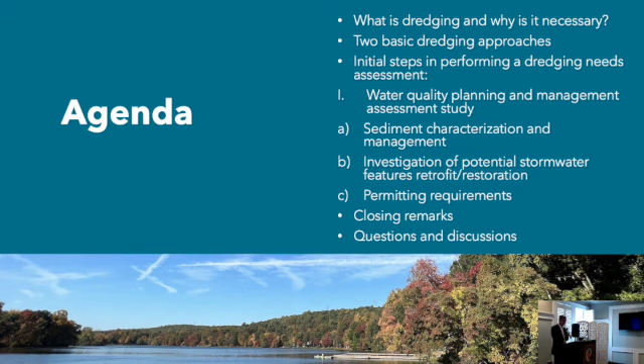So what is dredging? Dredging basically is the removal of organic matter and accumulated lake bottom sediments. That happens from a lot of natural processes, and can also be accelerated by man-made activities.

I have a lot of associations where the watershed directly adjacent to the lake was heavily wooded and naturally vegetated a long time ago, and then as years have gone on, members and property owners have cut the trees. They prefer to have grass over natural vegetation, and that has accelerated the deposition of organic matter, as well as adding nutrients and other things, which we won't get into today. But that affects the water quality of the lake. A lot of our lakes are now dealing with algal blooms and other things that are a function of the nutrients.

The dredging process essentially consists of 4 phases. You've got to loosen the bottom material. Every lake is different with respect to what the bottom material is. Again, for dredging purposes, we're really talking about the materials that have accumulated over time. So it's not deepening what the natural depth of the lake was—that's a whole different process and different permitting process through the DEP. So the way I'll be talking about dredging today is more focused on what has accumulated over time at the lake bottom and how to manage that.

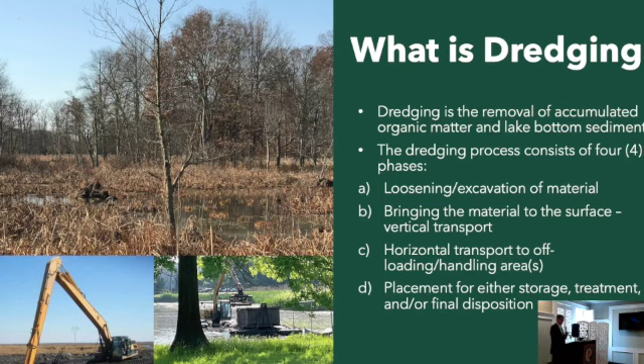Why dredge? Predominantly what I see from the associations I work with and lake owners is to restore the recreational access for boating, swimming, and fishing. Those are the primary benefits of dredging, as well as obviously aesthetics being a big part of it, and improved water quality and health of the lake.

This is not dredging. Dredging is not the sole factor that will help improve the water quality and health, but it's certainly one of the many steps that can be a benefit.

Other benefits are, sediment continues to move. If you look at this picture, the bottom portion here, you can see a lot of sediment accumulation from inflowing streams of that nature. As storms occur and high flows come in, that sediment continues to get resuspended and migrated down into the impoundment, the water body. So the benefit of removing that is it lessens the conditions from getting worse downstream.

It improves fish habitat and reduces rooted aquatic plants, which many lakes deal with as challenges. And then there are lake-specific concerns, so it can be algal blooms, Lyngbya, or shoreline issues. Again, a lot of them are site-specific to lakes.

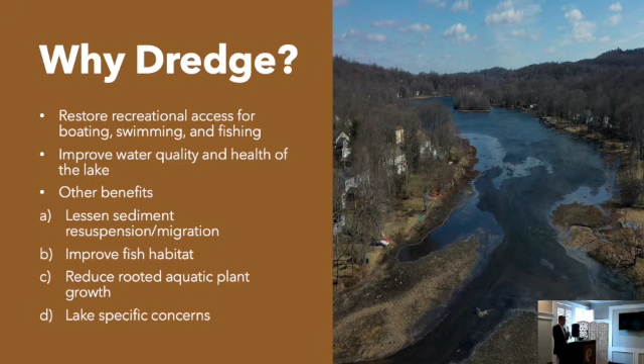So I'll talk today about the two basic dredging approaches: hydraulic dredging and mechanical dredging.

Both methods really require a lot of thought and planning as to what may be the best method for your lake. The dredging machinery for hydraulic dredging is essentially equipment floating on the hull of the watercraft, which moves around the water body to allow augers and cutters to loosen that material so it can be suctioned from a pump system, and then through piping will take it to some type of treatment facility.

So this is a larger project, on the bottom slide, where it's a complicated dewatering process. The slurry material is pumped from the barge system to a processing system where the water is removed from it, organic and sediment materials are separated out, and then you'll see stockpiles on the left side of the image. It's a fairly complicated process, and I'm not trying to make hydraulic dredging look overly complicated, but it needs the area to have these type of facilities in order to manage that process.

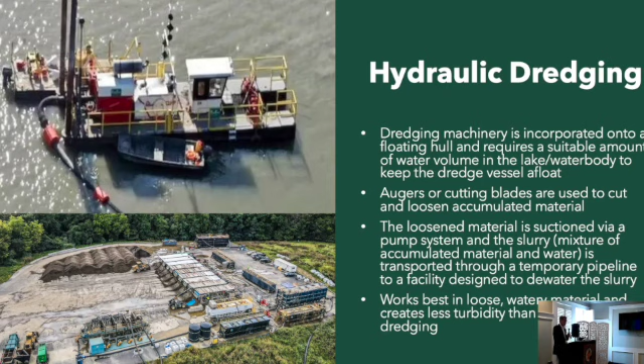I see a lot of mechanical dredging. Mechanical dredging can be approached as either wet or dry. A lot of this, from a wet standpoint, has to do with drafting, being able to draft the watercraft in order to move around the lake. If the lake has filled in so substantially that it can't be drafted, that could be a challenge, or that may have to be part of the process of creating a channel in order for the watercraft to move around.

Dry dredging is accomplished by lowering the water level, or berming up areas to create zones that can be dewatered, and then the material can actually be physically moved within the lake itself. That's accomplished with equipment that actually goes into the lake, usually with haul roads or access ways created. Other challenges include sometimes needing easements from property owners to allow the equipment to come through the properties and things of that nature.

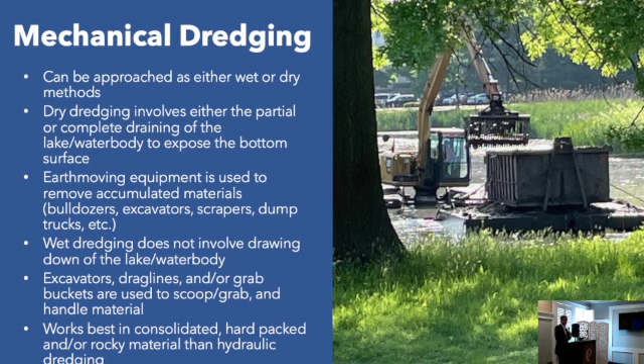So again, there's a lot to plan for and think about. I talked about wet dredging, essentially being done without the drawdown. Excavators, drag lines, or grab buckets are what would be used for mechanical dredging, again on a case-by-case basis, and it works best in hard-packed and/or rocky material compared to hydraulic dredging, as I mentioned earlier. So that gives you just a quick overview of the two dredging methods.

Now I'm going to talk about water quality planning and management assessment studies. This to me is very important. It helps to give the board or ownership an understanding of what the challenges are, and how you can set forth a roadmap for going forward.

It also helps in informing the membership of associations about the process that the board is going through, and how the process takes such a long time. We see many times that folks who are owning or members of the associations want to see something happen. The conditions are bad, how do we make it better, and they'd like to see something happen quickly. But being able to present studies with a factual, scientific basis really helps to educate everyone as to how the process can be navigated.

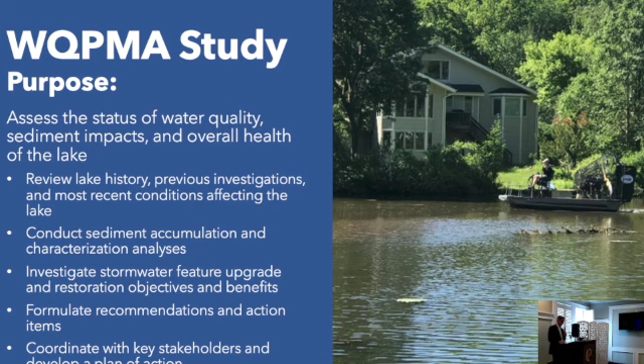Key stakeholders are obviously ownership, members, and boards. But I find it critically important to engage outside agencies too, like the municipality you're in, or engaging the DEP in early conversations to find the best path for your particular situation. It's critical to strongly advocate for yourselves because it's a difficult process. It's not straightforward - the rules are the rules, but they're applied differently with respect to certain circumstances. So all that is critical for engaging stakeholders in developing those critical action plans.

So I'll talk about the lake's sediment impact assessment. What would be done is a watercraft would be placed on the lake and sediment cores taken of the bottom sediment, to essentially see what it's composed of and also help establish the bottom of the lake. You'll see a definitive change in the material from what has accumulated in the lake versus what the lake bottom was, depending on the origin of the lake.

Many of the lakes we deal with have been dammed up, so they were previously streams. You'll find a stream bed channel configuration on the bottom, which is important, especially for adjoining property owners - they sometimes expect that as part of a dredging program they're going to have significant depth of water next to their properties. However, what folks don't realize is that when the streams were dammed up, they looked like a V shape, because the stream was a narrow channel with maybe some floodplain wetlands alongside. So when the stream got dammed up, the water level rose, but along the new shoreline that was usually flat land - a wetland or something like that. So there was never really a lot of depth there to begin with.

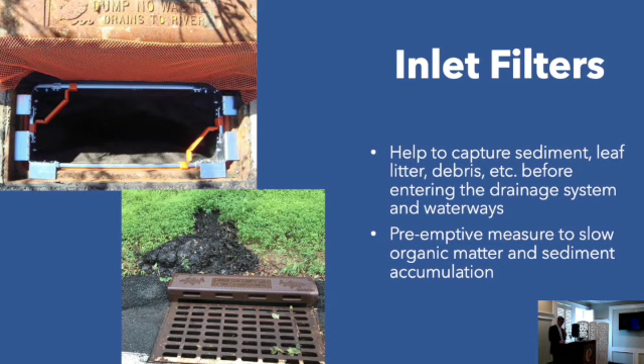Stream bank stabilization. I see this a lot, and it's a challenging topic because there's a lot of material removed from the erosion of these banks that gets brought to the waterways. So if you're planning a dredge project with substantial cost, you want to correct these situations, because it's just going to accelerate the sediment and material accumulation back into your water bodies. I see around a lot of the impoundments we work around that this is a fairly typical condition.

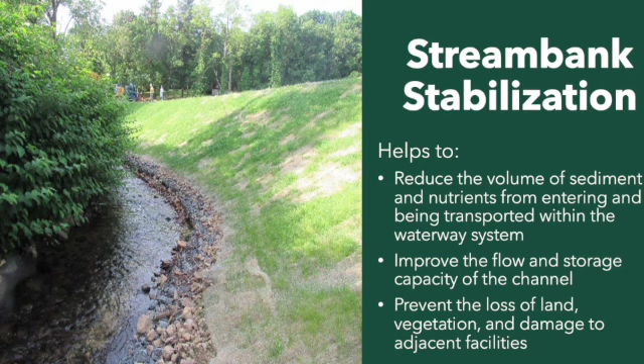Permitting requirements. I'll just run through some of the permits that we typically see. So we generally look to a General Permit 13 for lake dredging.

That allows us to get the approvals that we need from DEP. There's certain characteristics—we're allowed to do up to 1 acre of wetland disturbance within the water body, and transition area disturbance allowed for access and things like that, subject to discussing and reviewing with the DEP.

This would be the primary permitting mechanism for lake dredging. Then there are flood hazard individual permit requirements for each circumstance. Depending if you're working within 200 feet of your dam, you may have to get a permit from Dam Safety. Many times I'll proactively engage the folks at Dam Safety just to let them know what I'm doing and the approach to the project—that's usually very beneficial.

Fish and Wildlife—if you're going to do mechanical dredging and lower your water body, you're going to need a water lowering permit, which you're probably all familiar with. I think it's the cheapest permit out there. County Soil Conservation District approval is going to be required, and potentially a Construction Activity Stormwater Permit 5G3, which covers stormwater potentially impacted by sediment and discharged to surface waters.

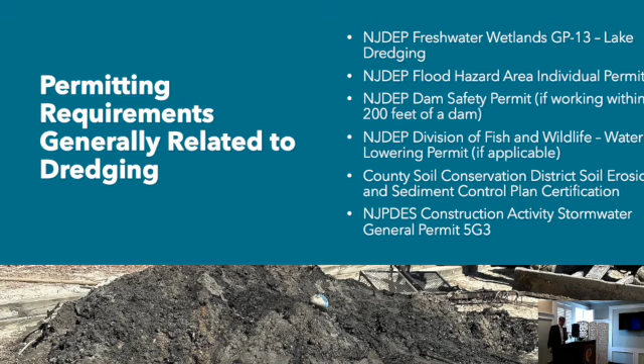So basically, I'll leave you with these final thoughts. I'm sorry, John—yes, those are only New Jersey permits.

Correct. So I was involved in a committee in my community looking at dredging, and we flowed into Lake Hopatcong and the Delaware River. We were told by an engineering firm that we had to go all the way up to EPA. Now this was 20, 25 years ago. I don't know if things have changed, or would we have to consider all the downstream bodies of water that our water goes into?

Not as part of your permitting. So your permitting would make sure that the measures that get approved can address those water quality and sediment concerns. With respect to where the water goes off-site, there's always a concern about how those discharges could potentially impact downstream tributaries and water bodies.

Because you were told that connects to the Delaware River and then all the way up to EPA... No, there's not a permitting requirement there. Maybe what I would do in those circumstances is engage the folks at Musconetcong and others, and let them know how you're planning to approach it.

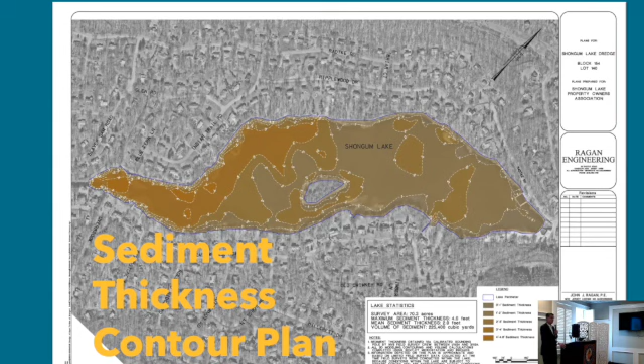Just the filing fees for the permits alone, do you happen to have a ballpark on what that is? I don't. Where was this lake located actually? Randolph, Morris County.

As you've been doing these sediment impact studies around New Jersey, do you see any accumulation of copper in the sediment from treating for algae? Yes, if lakes have been using copper sulfate or other copper-based compounds, it does increase the copper concentration in lakes.

How does that get mitigated? It becomes an issue with respect to the disposal of that sediment. The disposal facilities, if you're going to remove it off-site, have their own individual permitting requirements, and depending on the facilities you're looking at, various metals will have different allowable levels. So you just have to look at that with respect to how you're managing the sediment.

Would that limit your ability to store it on site if you did have that? Not necessarily, no. Thank you. You're welcome. I had thought before today that biomaterial and sediment were treated separately. Now they're all dredging. Yes.

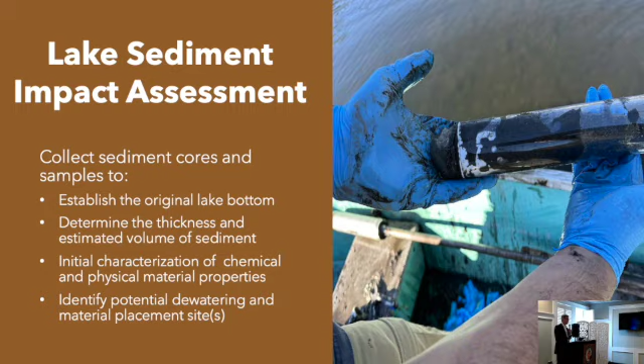In this group previously, we talked about the difficulties of finding organizations to take the material you remove from your lake bottom. Do you have that experience, or are you readily finding people that take the material? There are numerous ways to dispose of the material.

So that's not so much the challenge. It's the process between the lake and getting it there—the permitting and analysis and all that. Once that's all figured out, then there's places to take it. It's just how much money you have, and that's the challenge.

So I'd like to question, how do you define lake bottom? The reason I'm asking is I know that our lake, White Meadow Lake, had appeared and disappeared several times in the mid and late 19th century, depending on when they needed water for the White Meadow Lake mines and when they abandoned them, and when they brought the mines back online. When they didn't need the water, it became a marsh.

And then there's other lakes in Morris County that were man-made for recreation communities. So in our case, White Meadow Lake and these other lakes, the lake bottom is really an old marsh, an old swamp. So how would you define a lake bottom when it's really an old marsh or swamp?